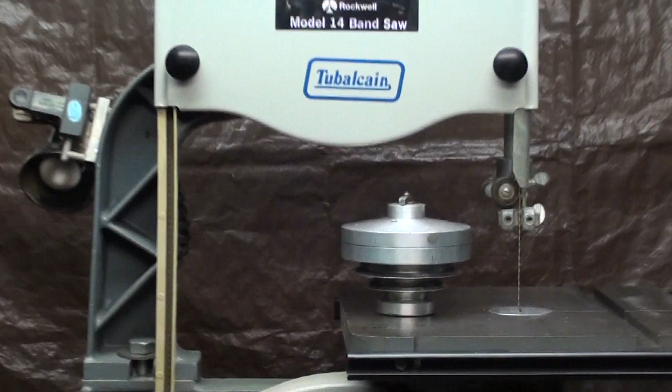I am going to convert it into a slow speed machine using the pull gear planetary gear reduction that I've talked about in several other videos. So take a look at what I'm going to show you now.

If you do not know what the pull gear system is, go back and watch these videos of mine where I rebuild one, I talk about them, and I use them on a drill press.

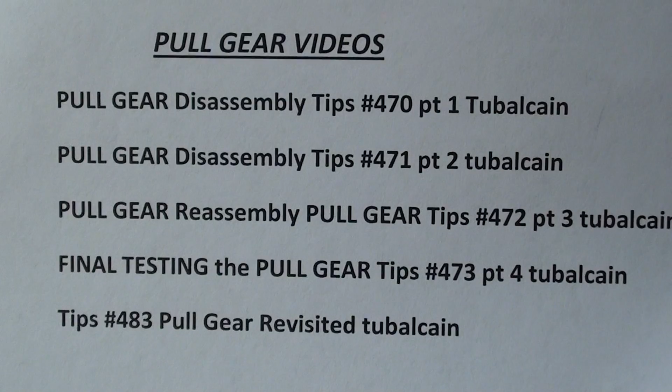I've turned the Rockwell Delta bandsaw around so we can talk about it from the back side. This was bought from JCPenney, so the stand it's on may have been a proprietary item sold only at JCPenney's, because these saws came with several different stands. This happens to be, I think, the perfect platform to do what I'm doing here in the demonstration, converting it to metal cutting with different motors and so on.

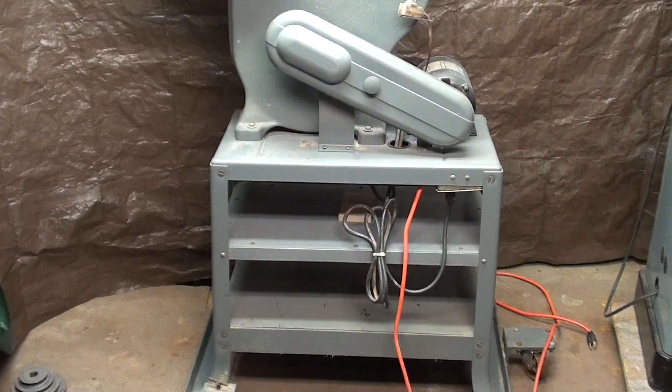You probably don't have this stand. In fact, if you do have a Delta bandsaw, most of the stands are much narrower from left to right. Take a look at Jimmy DeResta's and you'll see what those typical stands looked like. There may not be room on those stands to do what I'm doing, and the conversion would have to be down at the bottom. Similarly, when you look at my other one that I've shown, there probably isn't room inside the cabinet. This is more of a cabinet stand, so I will open that up later.

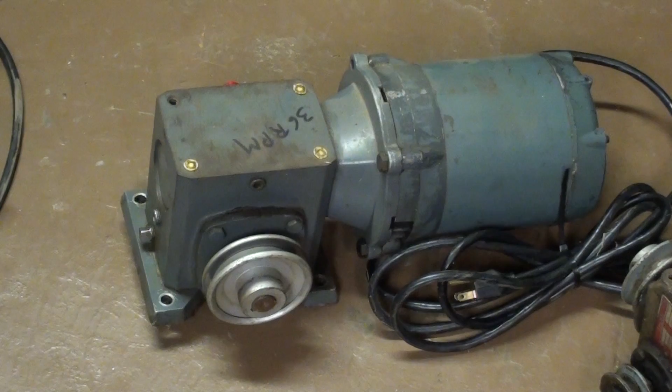It probably will work with the pull gear. I don't know if it will work with the other systems that I intend to use. If my conversion is successful, I will probably try to mount this right angle drive motor gearbox. That's a worm drive, and that will slow it down. That's a 36 RPM. I forgot what the ratio is. I'll tell you when we get to that.

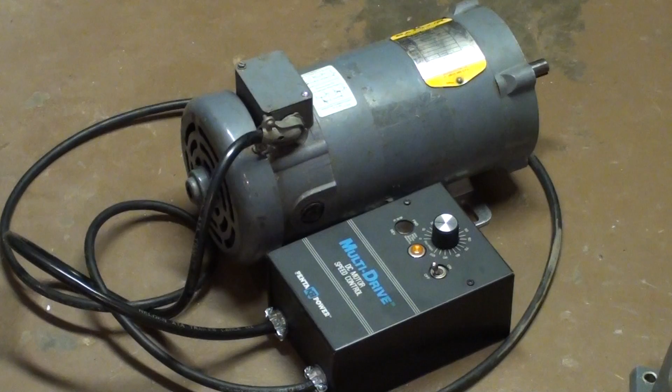Also, as you know, I have two of the DC motors with controls. I've shown a video on that, and I have one mounted on a drill press, but this other one I probably will mount on the bandsaw to see what happens. In addition, I have one or more of these right angle gearboxes. They also probably would work, but they have to be used in conjunction with an electric motor, so you've got belts to deal with, and you need belt guards and all the danger thereof.

I'm not really sure why I am doing this video, because there does not seem to be a demand or really any interest by people in having a vertical bandsaw. But if you have a machine shop, to me it's an essential. In general, they were only available in much larger versions, that is DoAll, Grob, and just large saws that are either too expensive or too large to get into the average home shop. So whether this is wanted or not, I'm going to go ahead with the video because I myself am interested in it, even though I have the other Boice-Crane bandsaw, which I have shown in a recent video.

And I understand that possibly the reason Delta didn't sell many of these is because I've only ever seen 2 or 3 of them equipped with the gearbox from the factory, because it probably doubled the price. If you were to buy this system that I got right here, you couldn't get it for less than $500. If you were to buy one of these brand new, I'm sure it's $500 or more, and even buying a gearbox like this and then a motor would probably be too expensive for the average person.

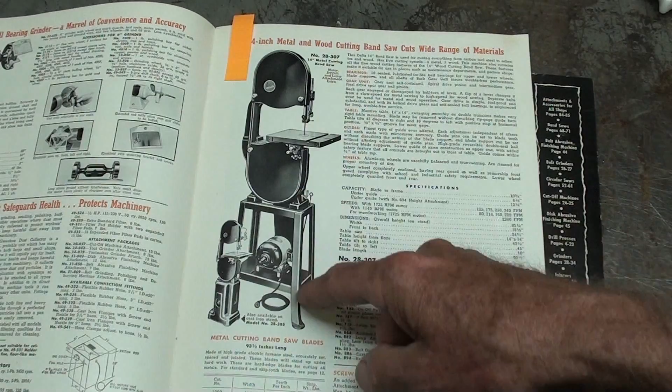And they offered that bandsaw with the typical open stand, and then they also had the cast iron stand. You'd never get one of these conversions inside of there.

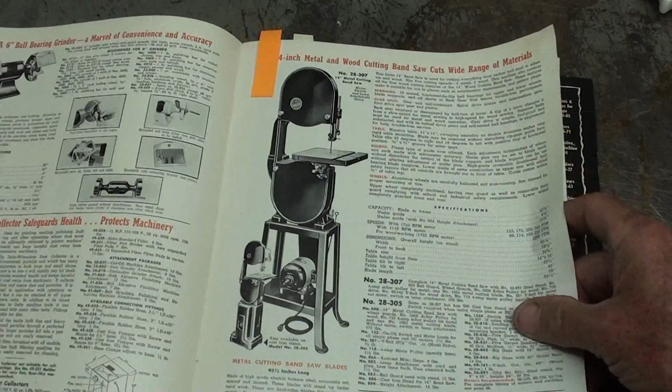But on the back of the bandsaw was a gearbox. They don't seem to show that in any of their literature here, but my brother had one, so if you turn the saw around to the back side, there was a gearbox in the approximate position of that upper pulley. Apparently they sold more than one type of gearbox or reduction over the years. Very little is said about that here, but I am going to zero in right now to the paragraph that talks about the gear unit.

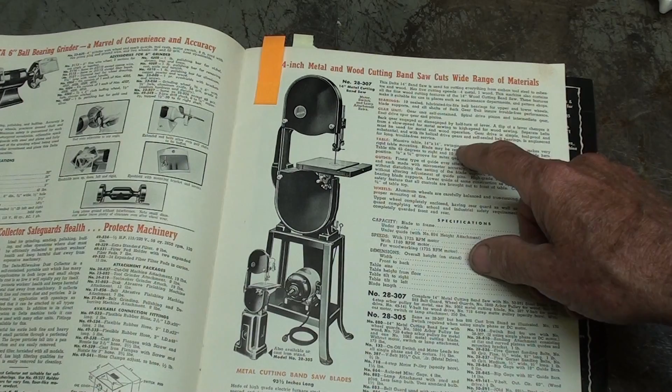This is a description of the gearbox in 1954. It required only a flip of a lever, as it says, and did not require a belt change. Let's take a look at what they did in the 1958 catalog, because they made a change, and who knows, probably to cheapen it.

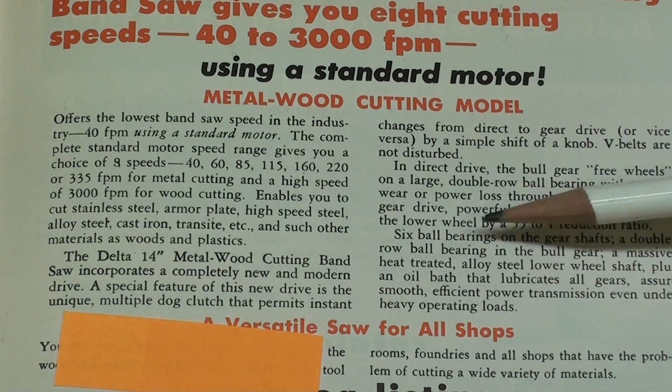This is a copy of the 1958 Delta Rockwell catalog. They cover this in a little more detail here, including telling you that the speed now is available between 40 and 3,000 feet per minute. So read this paragraph beginning right here and continuing up here. They call it a new gearbox, so they made a change apparently that year or the year before. You can read through that if that is of any interest to you, to show you how Delta did it.

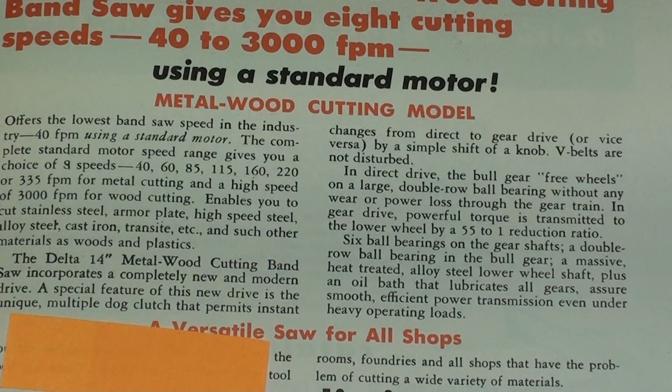My brother's saw, which would have been from the late 60s, was mounted on an open stand, but not this stand, the one like Jimmy's. There was a cover right here, probably a foot wide and 18 inches high, with a door on it. You could open the door and make the speed change. I don't remember exactly how it works. I've only ever seen one of those, and that was my brother's.

He did not like it. He did not like the whole saw, because if you are used to DoAll saws or Grob saws, industrial saws, this will not satisfy you. If you're only used to a hacksaw, you'll love it.

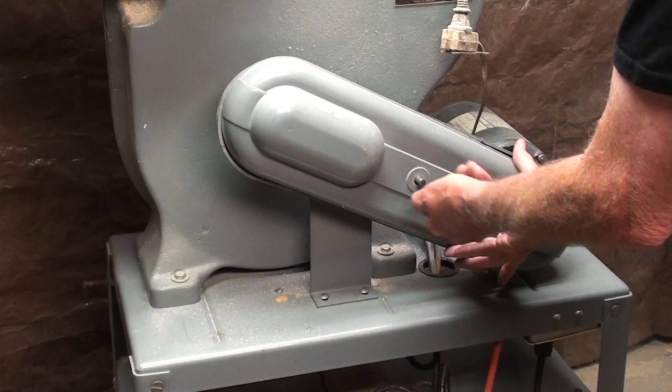So how am I going to do this? Well, I've never done it before, but I'll be taking that cover off, and then I will also have to remove the other half of the clamshell die-cast zinc guard, and take that belt off. I don't know what I'll have to do, but I am going to change some pulleys. I'm not sure just what.

Remember, that's a 1750 RPM motor, and the gearbox will slow it by a ratio of 4.5 to 1. We've got a 4-inch pulley on one end, and a 2-inch pulley on the other end. I think I will need a further reduction than what we have here, but we'll see what happens when I do. I did a little math in my head, or really on paper, as to what the speeds would end up being, but I think I want to get down to 100 or 150 feet per minute, and we'll see if I can do that.

So in the next scene, I will already have this disassembled, and I'll be talking about mounting the pulley gear.

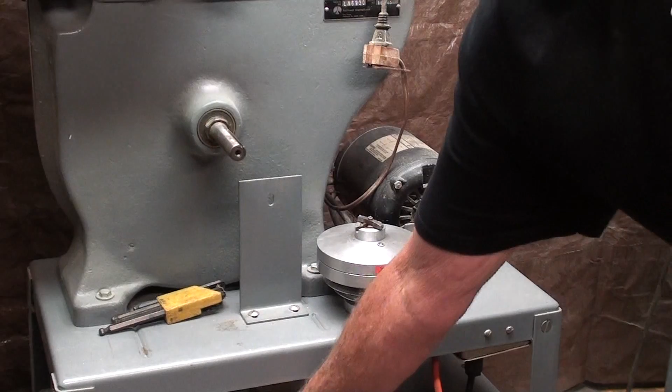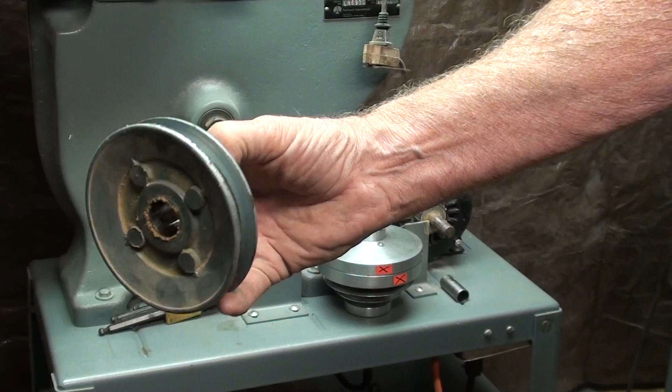Alright, have a gander at what I've done so far. Now, I pulled the 4-inch pulley off the main shaft. That may not have been necessary, and it did require a puller. I must tell you, be very careful when you pull die-cast pulleys off so you don't break them, because they are brittle. This just needed a little persuading. It wasn't terribly bad, but that'll give me a chance to polish these two shafts so that I don't have to fight pulley changes and all of that.

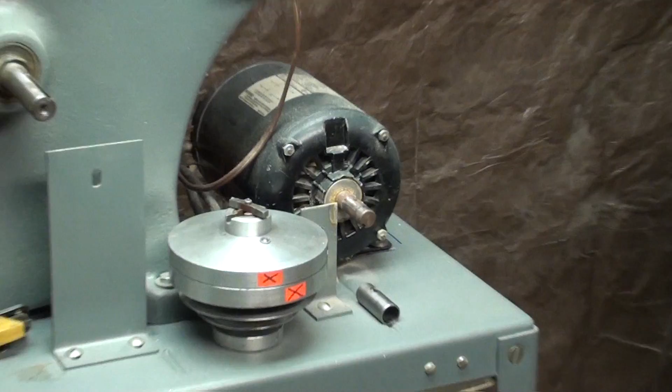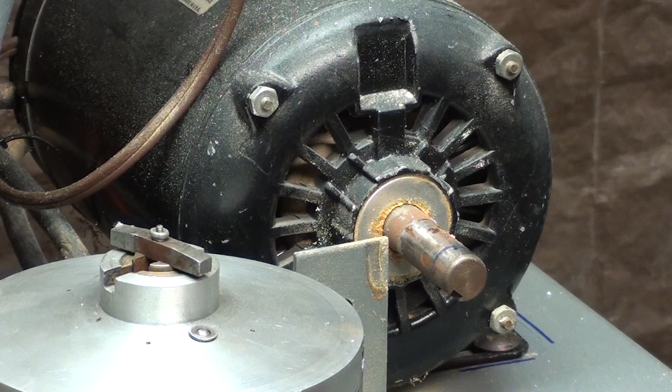But what I'm going to do now, and again, let me harangue just a bit on the open-faced motors, the open-frame motors that allow dust to go all through them. It's an insane thing that they do when they provide a motor like that, because you would... well, I expect it to fail, although this is already 30 years old, and it hasn't, but I don't like the idea of sawdust in there, and I think I will blow it out before I finish this project.

Now, I may have to, and I may not have to, take these two brackets off. I don't know if they're in the way, but it looks like the one here on the motor probably is going to be in the way. So I'll get back to you in a couple minutes after I've got this pulley gear mounted on the motor.

Now, this is a 3/4 bore, and that's a 5/8 shaft.

So remember, I had this bushing made a long time ago with the hole for the set screw and everything, so that'll make it easier for me. And I hope I have the belt alignment and everything, and I will have to probably go out into the garage, into my stash of hundreds of V-belts to find the right size belt.

I do have the motor loosened. It's slotted, so I had to move it to loosen the belt so I didn't have to fight the belt. And I took pictures of the position of the pulleys before I took them off. Why? Because someday I'm going to convert this back to wood, and I will forget about what was what. Even if I do it tomorrow, I will have forgotten. So pictures are a very handy thing. I've talked about that before, and I know a lot of you do that.

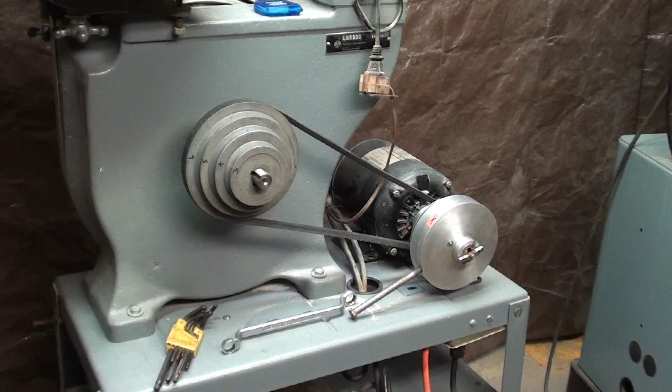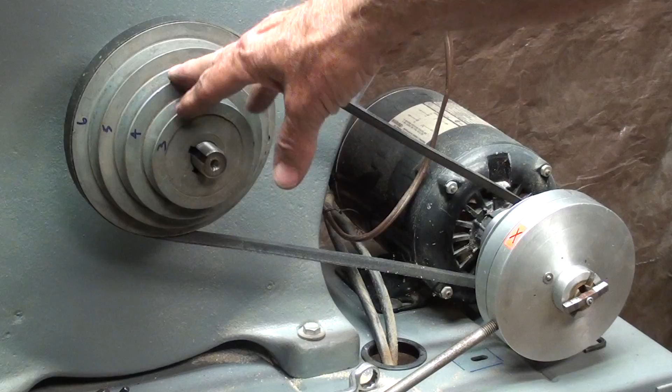Well, I'm back, and it's about 45 minutes later, and I'm sweating like a hog. It's kind of warm down here. Well, look what I've done. I've got the pull gear mounted on the motor, and I've got a step pulley mounted on the main shaft. The 4-inch pulley just isn't going to be big enough, so I'm using the 6-inch pulley on the step pulley. That still gives me a range here, and I'm on the smallest pulley.

Remember, there's 3 grooves on the pull gear. So doing the math, and I won't belabor this, but the pull gear reduces the 1725 motor down to 383 RPM. So we got 383 RPM here. Now the ratio here between the 2.5 and the 6 is really a 2.4 to 1 ratio. So doing the math again, the final RPM as calculated mathematically is 159 RPM, and the Stewart Warner tachometer doesn't really go very accurate at that point, but we're going to attempt to measure it here in a minute.

But I want to tell you a few other things now. Number one, make sure that you have your motor unplugged when you work on the pulleys and the belts. That goes for any machine.

Safety first. Now, when I use the pull gear on a drill press, somebody said, well, why do you have that strapped down? And I'm going to have to tie this down with a wire tie or make a bracket or something, because when you start it up, there's quite a rebound. Quite a rebound. So it needs to be retained, and I will do so in a minute.

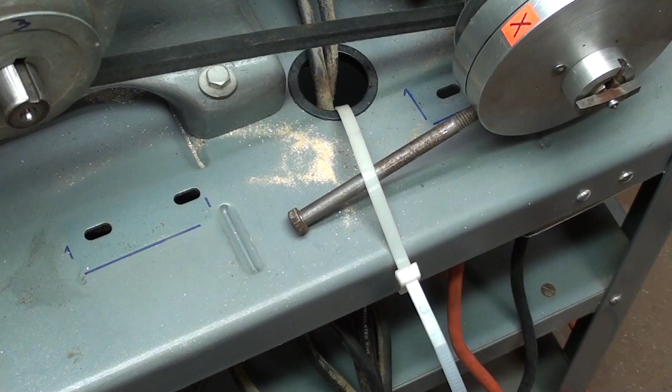Okay, so I did put a heavy-duty wire tie on here, and that is necessary because of the rebound. So that was my fix for that, even though it is strictly hillbilly style, but for a temporary video and a temporary application, I think that will do the job.

By the way, I didn't really need a step pulley here. It's just that this step pulley happened to have a 6-inch sheave on it, so anyway, that's the largest that I got. But now that some of the busy work here is done, I have done the mathematical calculations.

Remember, there's a 4.5 to 1 ratio here. And then the ratio here, I got to look it up again, I forgot what it was. But doing the math for this real quickly, about 2.4, 2.5 to 6 was the ratio there. But the two ratios combined still, mathematically, produce only an RPM right here of about 160. I really wanted it much lower than that, so this is not going to be slow enough for steel cutting.

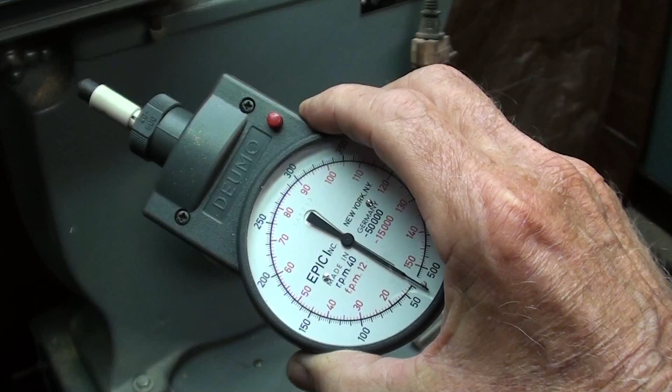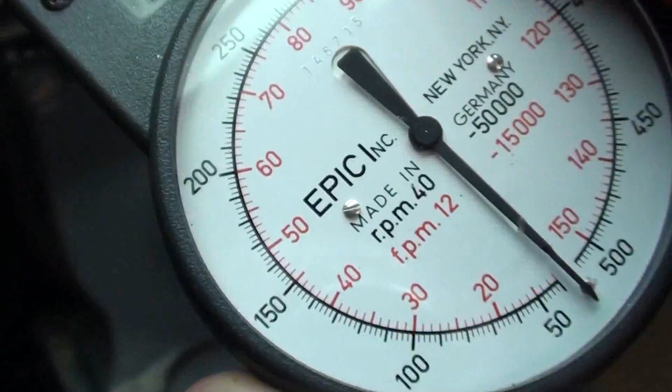I'm quite discouraged now, but what I'll do right now is to take a reading, and I'm going to use this tachometer because the Stewart Warner tachometer does not do that well at low RPM, and this is more precise. That's the German one here, however you pronounce that. I just call it the Epic. That's the New York name, probably the importer, but that's the German name.

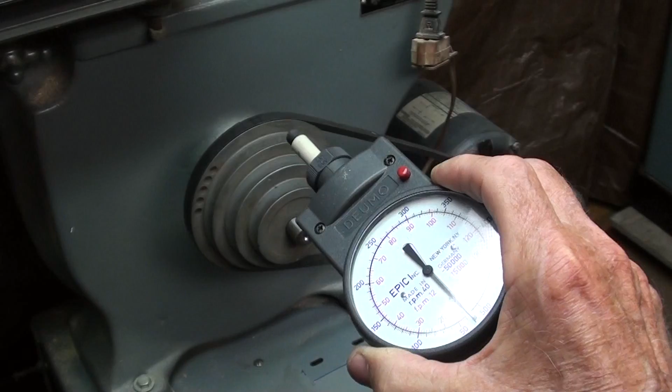So I'm going to turn it on now, and I'll take a reading here to verify the mathematical one. That's really 8th grade math. It's just that there's two computations there that have to be added together, and then, well, all right, let me go ahead and take that reading, and then I'll tell you what the actual blade speed is.

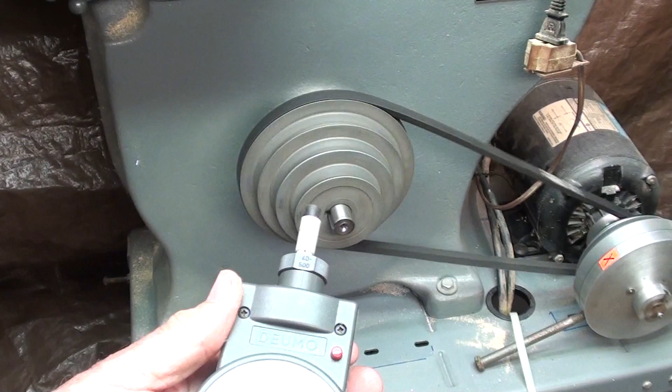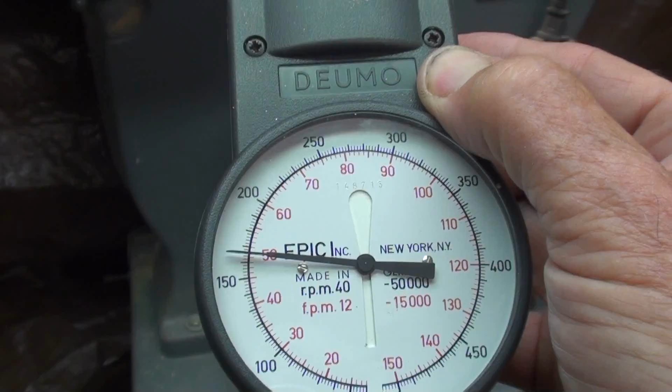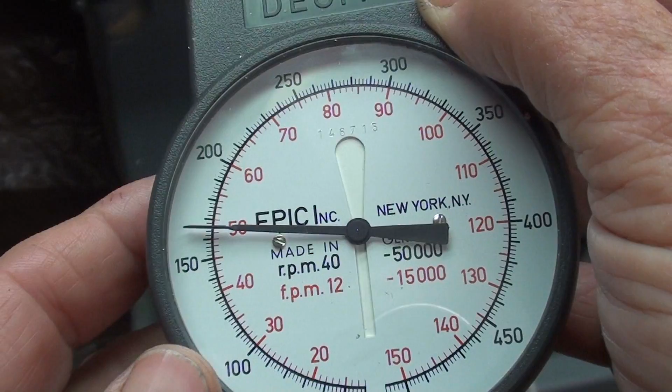Yes, my math was correct. It's right about at 160 RPM, that's the black scale on the outside there. And boy, that pull gear is loud, isn't it? I did put grease in there too, not just oil, but I suppose it's just worn. I can't be worried about that, but it is loud. So it's going way too fast at this point.

I am mildly, actually, more than mild. I'm extremely discouraged.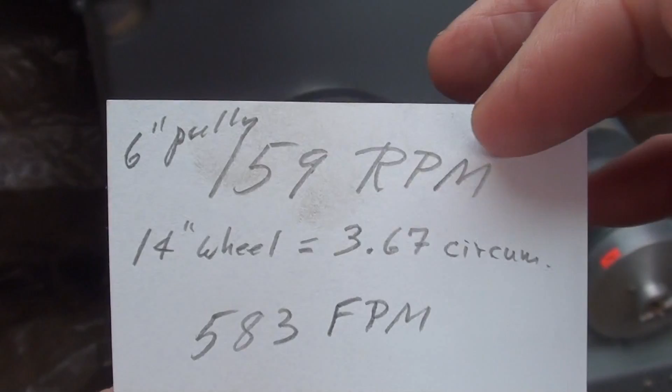Well, I did the math on that, just on scratch paper here. The 6-inch pulley at 159 RPM and a 14-inch wheel on the bandsaw - I won't tell you the formulas, I did that in another video - but it comes out to 583 feet per minute, and my target was more like 100 or so, between 100 and 200, so it's just way too fast.

So, all right, what's the plan here?

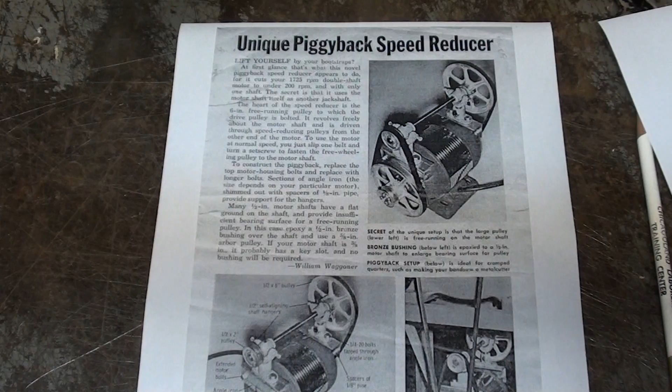In my discouragement, I quit for a while, and I went upstairs and I thought, I'll check my email and collect my thoughts. When I checked my email, I cannot believe the coincidence. Tom Christ, a regular viewer, sent me an email with an attachment, and what a coincidence that this should come in the middle of me making a video about speed reducing on the bandsaw.

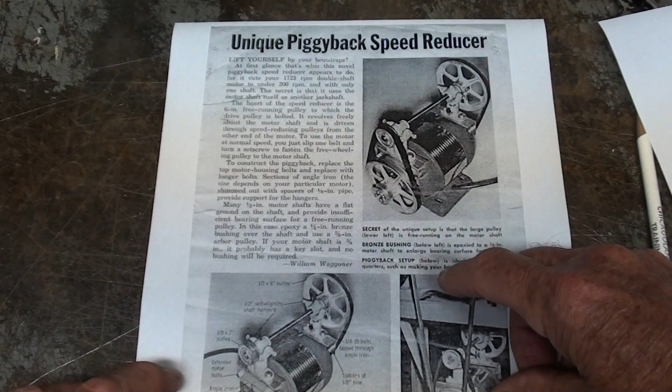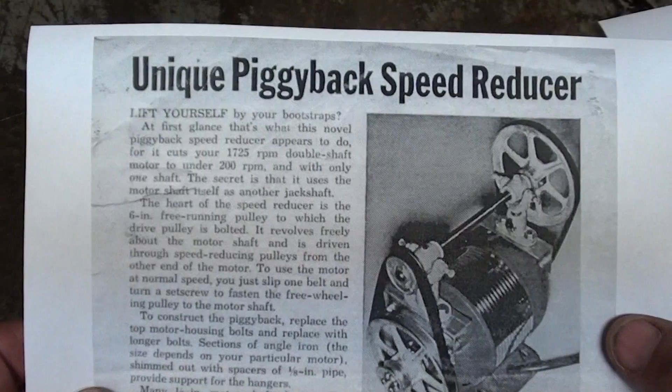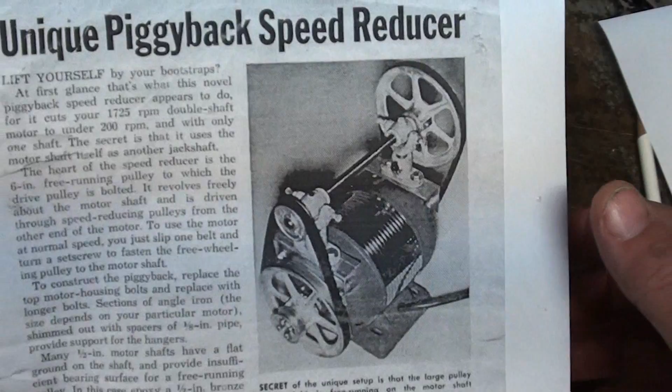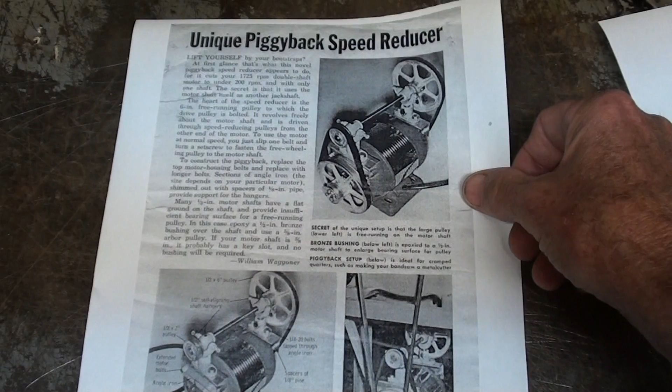This is an article, a page out of Popular Mechanics magazine, February 1969, where a man makes a speed reducer, and as I told you, it requires jack shafts, and there it is. I do not intend to do this, but I just thought it was unique that it would come in, and thank you, Tom, for sending this at that time. You can go into Google and find that should you want to, because this is probably something that everybody can do by buying some pulleys and belts. The problem here is that these, as I mentioned earlier in the video, are quite large - they get a big foot space and would be hard to install in the cabinet of a bandsaw. But I thought that was pretty neat.

Well, I'm back, and I'm renewed and refreshed a little bit. It's a couple hours later, so what am I going to do here? Because this is not usable, it does not meet any of my objectives. Remember that the speed over there on the Boice-Crane was only 40 RPM or something to give me that 105. Well, I know I'm not going to be able to get 105 unless I put a pulley on here that was so big it would actually strike the table.

So I'm thinking, I don't know if they have a 12-inch pulley down at the hardware store, but that's probably about as large as I could get in there. I didn't want to spend a lot of money on this because it's all temporary. But I just did the math, and if I were to install a 12-inch pulley, that would reduce the speed here half of what it is now, bringing me down to about 80 RPM. The shaft would be going 80 RPM. Well, that's still not going to give me all that low a speed, but it'll bring it down to about 290 feet per minute, and that will work. It's just a little faster than I wanted it to be, but I'm going to go ahead.

That's the plan - I'm going to put on a 12-inch pulley, so I'm going to go down to the store downtown and check that out. I think I'll take a short video of me looking through the pulleys to see what they've got there. It's a farm store, so they might have that kind of stuff, because I looked at Ace Hardware earlier in the week and I didn't like what they had. So, all right, let's go shopping.

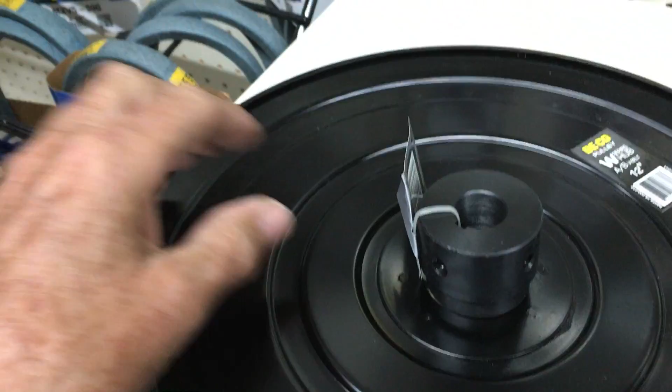But sometimes you just got to bite the bullet, and that hub will weld into the pulley. It doesn't go in right now because of that plastic. Well, that's what I'm going to have to do.

This is 12-inch, and they do go up to 14, and then there's even a 16-inch, which I don't think would fit on the machine. So, up to the cashier I go.

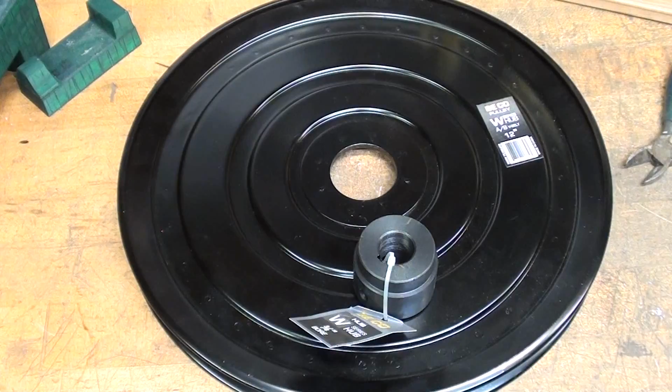Did you like that little shopping trip?

It's just done with my phone, so I know it's not very good, but there again is the hub. And this was $22.50. It rang up at $22.50 for the both of these. So there's the 3/4 hub.

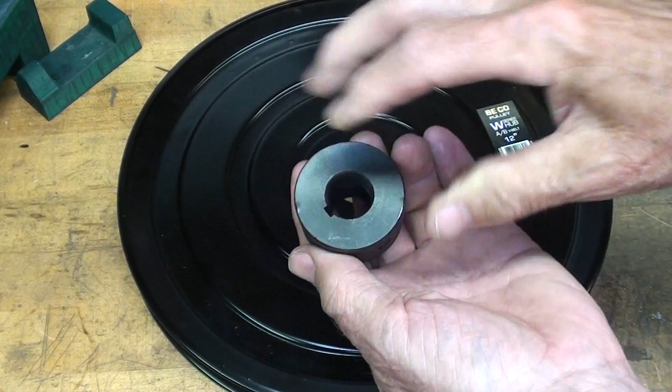I will check that now to see that it goes on the shaft without it struggling. And then I'm going to take the grinder and just remove a little bit of paint there. This isn't painted, that's just blued, and that will go on like that.

And I'm going to just tack it on there. No big deal, it doesn't have to hold very much, but boy, they had a nice selection down there, didn't they? So that should slow me down to the figures that I just gave you a few minutes ago.

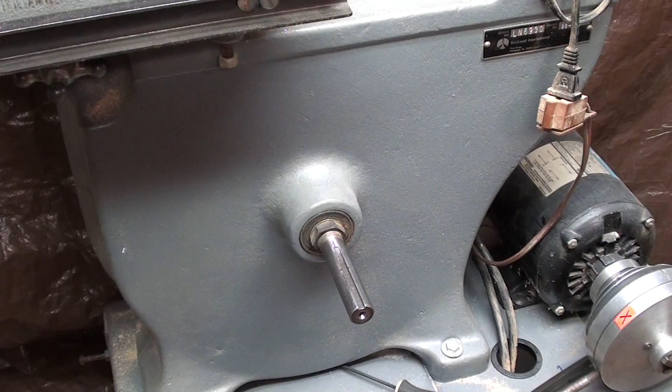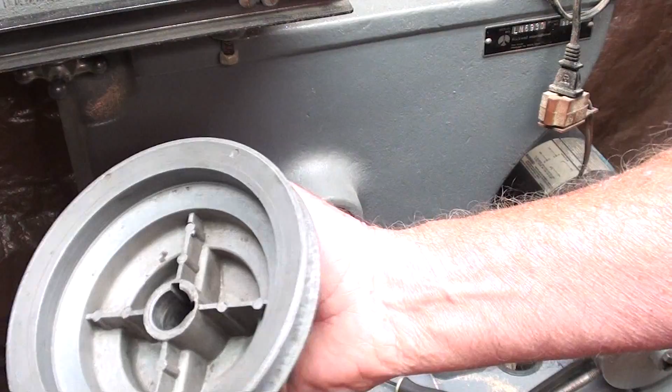It's an hour later and I still don't have the pulley ready, and I ran into a little problem. I cannot get the belt grooves to line up this way, so I still may have to move the motor out a little bit toward me here. You see when I had this pulley, it's dished in here, and it would go in far enough to where it would go over this casting part here.

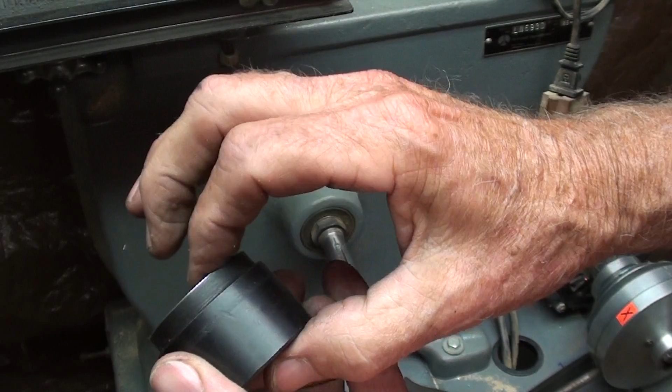So what I've done on this one, first of all, I machined it off. I took almost 3/16 off. Then I counterbored it because there is a thread here on this shaft that is larger than the diameter of this shaft. So those two things aside, I got the hub to go in farther.

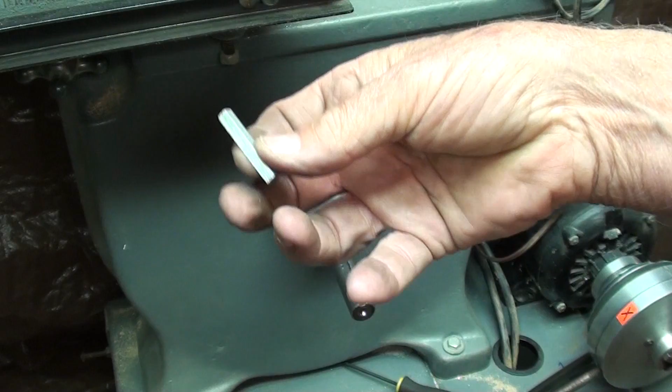I think it'll line up. But notice that the keyway here ends, you know how they taper off, right where my thumbnail is. So I added another set screw so that this one will catch at least a little bit of the key. And again, this is all temporary, so that's going to do nicely.

And I removed some paint here, so now I truly am finally ready to weld. Be back in a little while.

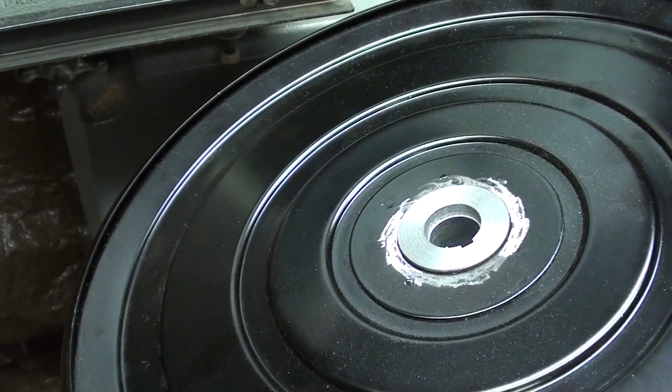Actually, it's only 1 minute later and it's raining outside, and guess what? That's right, the water is creeping in. So I have to hurry up and get done with this before I reach flood stage.

Wow, it's really 2 hours later. I had a rain delay. I did not want to weld in the rain because I have to weld outdoors.

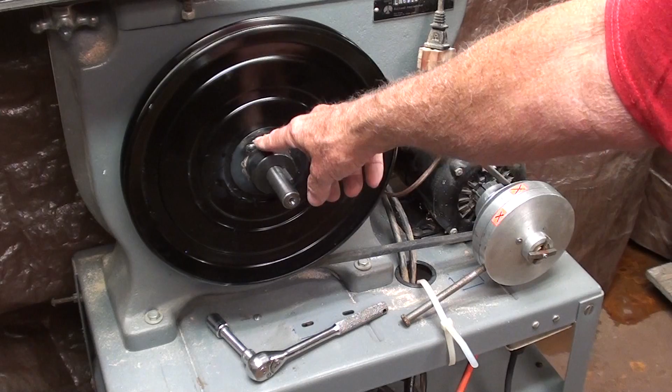So I got a couple tack welds. I never like to paint myself in a corner, so I just make short welds in case I have to cut them off. And that's plenty strong to hold, and I got the 12-inch pulley mounted.

I needed a 50-inch V-belt, and among the hundreds of belts that I have, I only had a 49 and a 51. Notice it's only $1.99 for whenever that was priced.

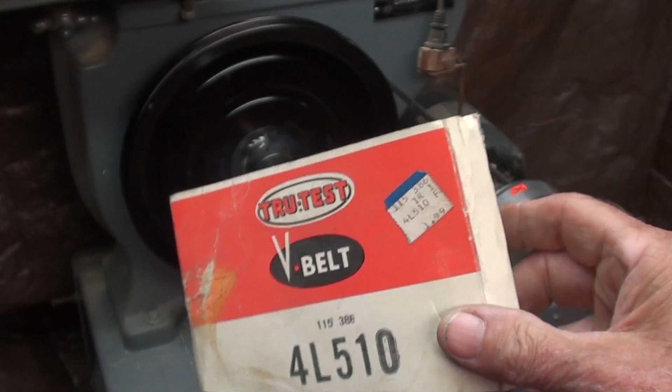Now that belt was triple wound like a bandsaw blade into here, so it's not running very true. I got pretty good alignment, at least good enough alignment between the two pulleys for the purposes of this video.

I do want to point out that unless you had a slow speed motor, even with this 12-inch wheel on here, and if let's say you went 14 or 15, there would be clearance here, you still would not get it slow enough without the bull gear. You'd have to have a 24-inch pulley here and a 2-inch pulley down here probably. So it can't be done without either jack shafts or gearboxes or the bull gear.

According to the mathematical calculations, the RPM of the shaft now, and of this wheel for that matter, should be around 80 RPM. So let's check it.

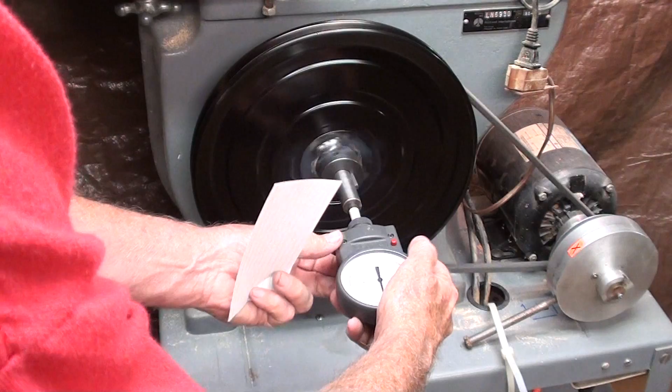And there it is, right around 80 RPM. And as I've talked about in other videos, since it's a 14-inch bandsaw wheel, the circumference of that wheel is 3.67 feet. And we do the math there and we come out with 293 feet per minute. And again, that's quite a bit faster than what I was planning on.

I was planning on about 100 or 150, and it's just not possible to get there without a much larger pulley. So this will have to do for this experiment. And now what I'm going to do is change the blade, put a metal cutting blade on, and turn the saw around, and we'll try it out.

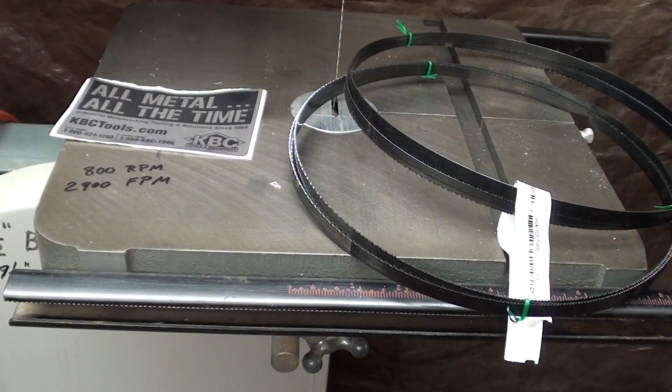A couple of weeks ago I ordered from KBC two 3/8 wide metal cutting blades, and they're Starrett Duratec, which is actually their cheapest blade. I did not buy one of the good blades. These are only about $15 or $18 apiece, because again, this is an experiment. I didn't want to buy a $40 bimetal blade for this, so these are cheaper blades, but probably what you would buy at home because it's affordable.

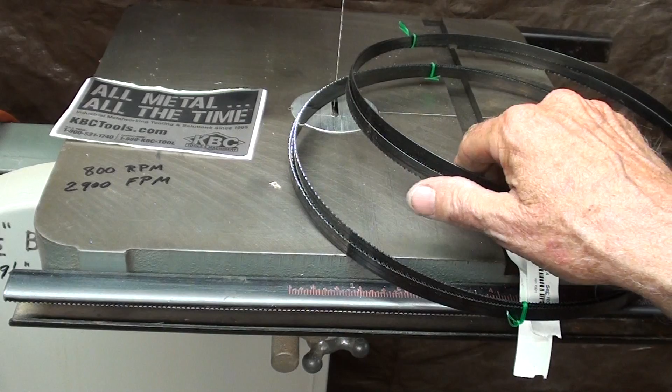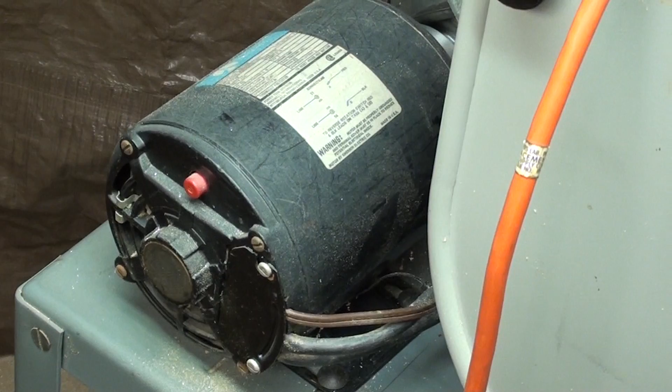I'll go ahead and install one of these blades, and I have to readjust the blade guides because the blade in there is 1/4 inch. Did you watch the previous video where I cut aluminum using this skip tooth blade at very high speed? It was quite successful for aluminum, but it would have ruined the blade instantly if I cut steel with it. Now the other thing I'm pondering is this is only a 1/3 horse motor and it's not capacitor start. Does it have the guts to do the actual cutting? It's geared down quite a bit, so I suspect it'll be okay. See you in a few minutes when I change that blade.

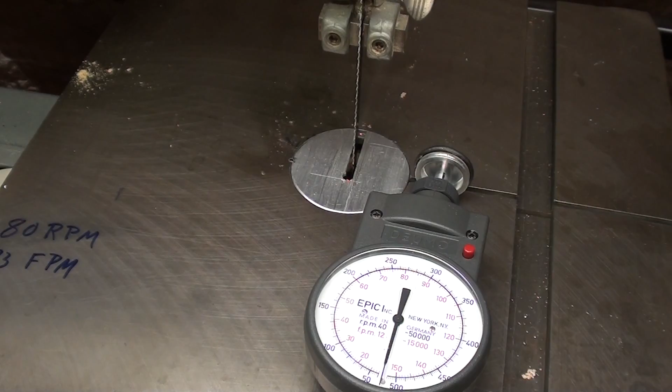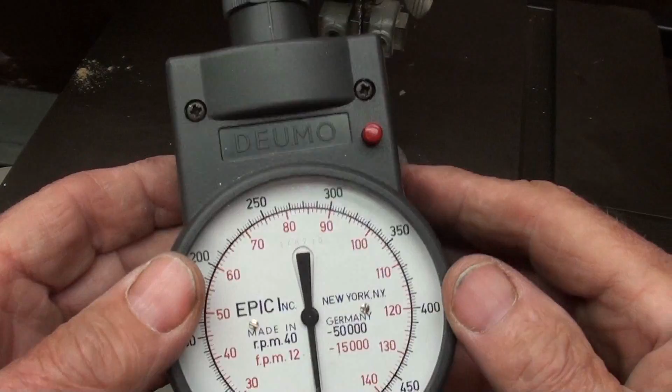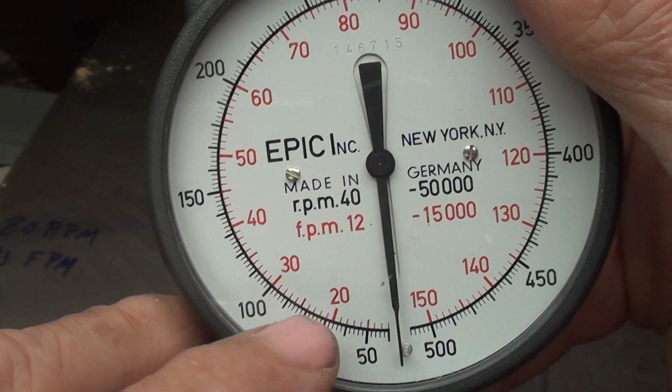Alright, the metal cutting Starrett blade is mounted, the guides adjusted, and before I start cutting, I know it's a lot of befores, isn't it? I'm going to verify it with the tachometer. I'm using a different scale now, the 400 to 5000 scale, so that'll be the inner red ring there. I have to rub the tire against the blade, but not the teeth. I don't want to hit the teeth.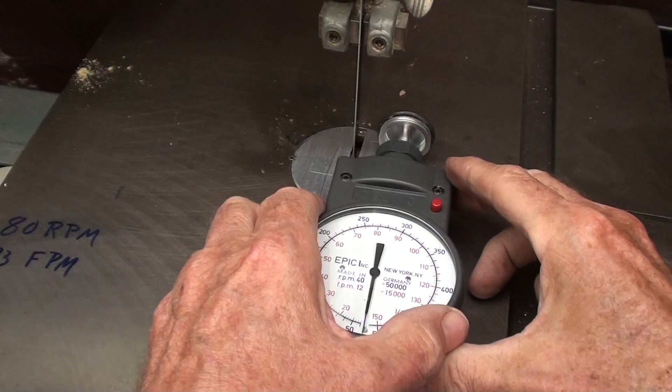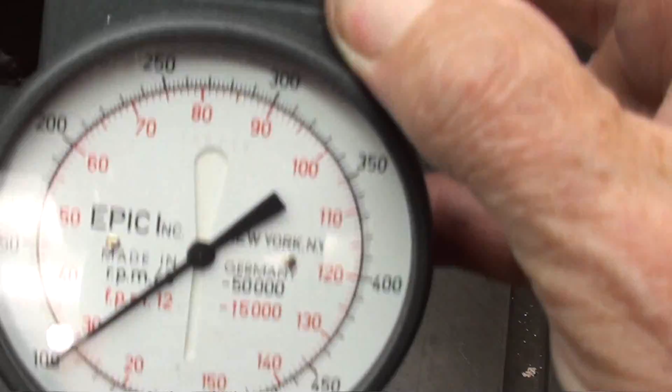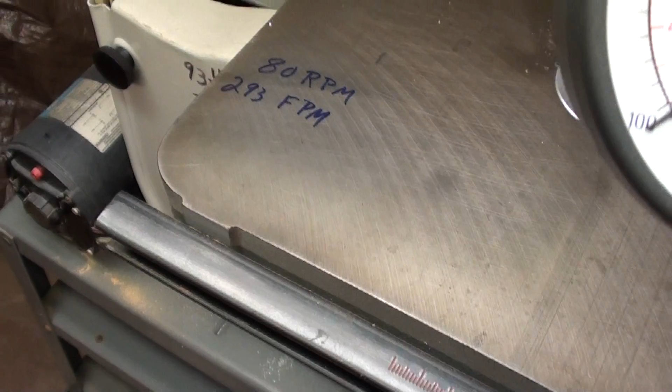So there you can see I'm basically almost up to the 300 feet per minute. Remember, 293 is what I calculated, so it's just a little under 300. So the math was correct, as verified by the tachometer.

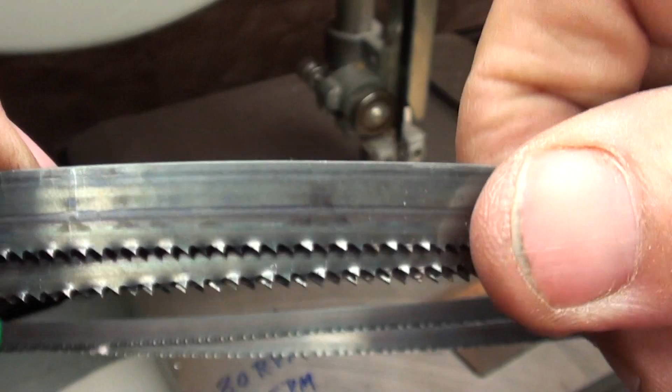I don't believe I mentioned it, but this blade is 25 thousandths thick, 14 teeth, and a regular raker type set, if you want to look at the teeth closely. So that's what I'm using. And here's a piece of 1/4 inch steel, so drum roll please.

And yes, Virginia, it does cut steel.

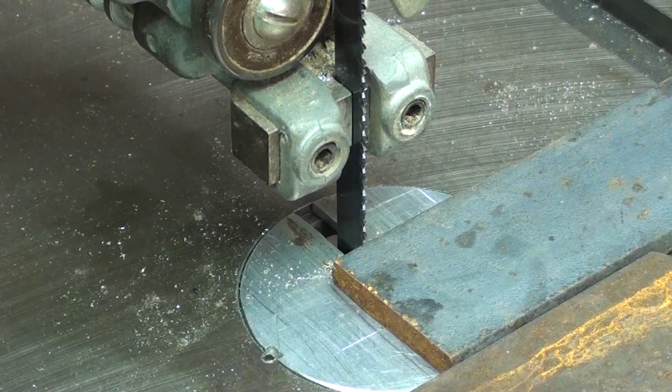This is 1/4 inch thick hot roll, and I wonder if I should have ordered a slightly coarser blade. It's a little slow cutting, but you don't want to change blades all the time. You have to find a pitch that works with different thicknesses. If I were to cut something real thin, like sheet metal, I'd need a fine blade, but it's going to cause it to cut a little coarser, or a little slower, on real thick metal. Again, this is 1/4 inch.

Sometimes these vertical metal cutting saws are called contour saws. However, with a 3/8 blade, I'm limited as to what curve I can cut. You understand that, it's the same thing for woodworking. So I'm just going to make straight cuts here unless I had a narrower blade, because the blade gets kind of delicate when you're cutting metal.

This is 1/2 inch aluminum. Half-inch thick rolled aluminum. And of course that doesn't cut nearly as fast as that skip tooth blade did the other day at high speed, if you watched that video.

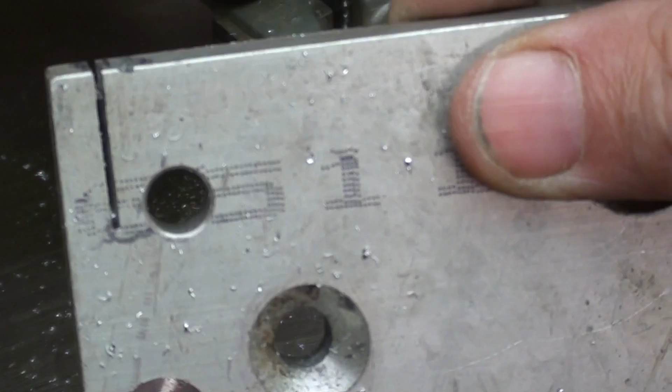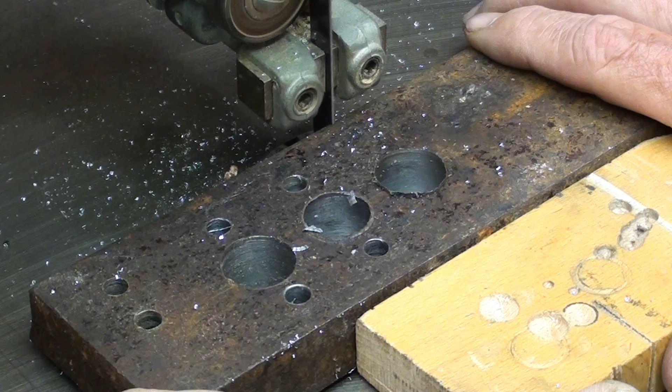This is some real nasty looking 3/4 inch thick steel, hot rolled, I guess. Now that's pretty slow going, as you'd expect on something that thick, but it sure beats the heck out of a hand hacksaw.

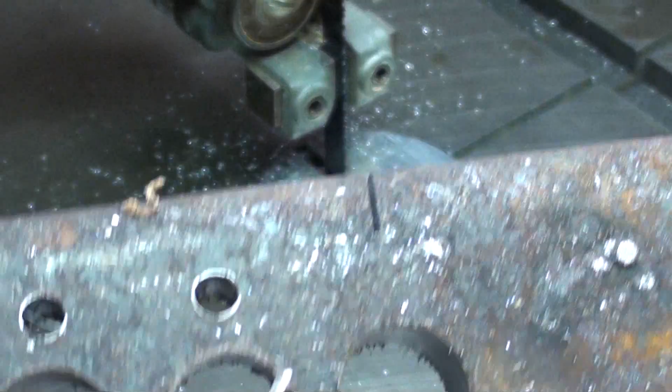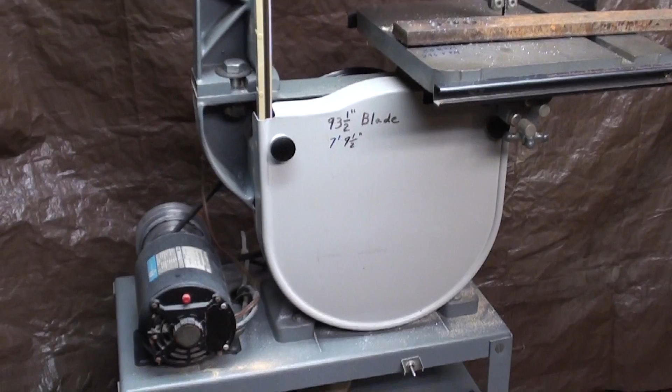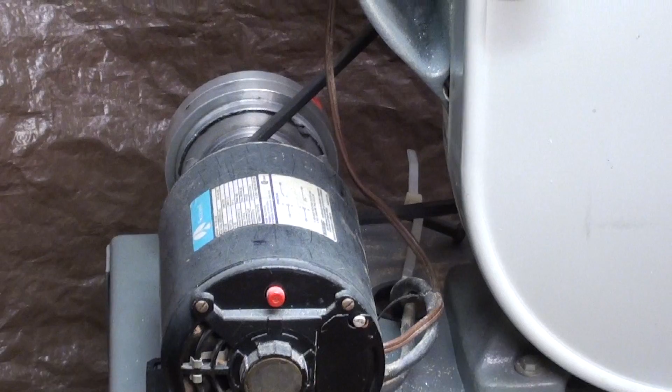Alright, I'd like to wrap this video up. If you think it was a long video to watch, boy, it took me 2 days to make it. So, a couple things I was worried about: number one, would that little 1/3 horse motor be powerful enough? Well, it certainly is, of course it's geared down so majorly. Secondly, I thought possibly the belts would slip, but I don't see that happening at all, and I was really laying into that last piece.

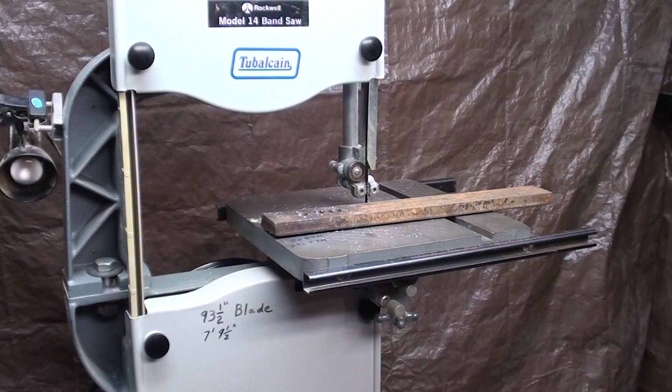And finally, since this is a wood cutting bandsaw, and this whole frame here, I talked about that, is not rigid and hollow and tubular like the original, I thought there might be some flexing, vibration and chatter, but there doesn't seem to be any. So I am more than pleased at the way this experiment turned out. I'd call it a great success in converting a wood cutting 14-inch Rockwell into a metal cutting saw.

Now I am not going to leave it set up with the pulley for several reasons. That pulley needs to go back on my drill press, and secondly, the follow-up videos will be made, so be sure and watch those with the gearboxes and the DC motor and other things like that. Now I really hope you enjoyed this video and that some of you can apply this into your own metalworking basement shops if you're desperate for a bandsaw.